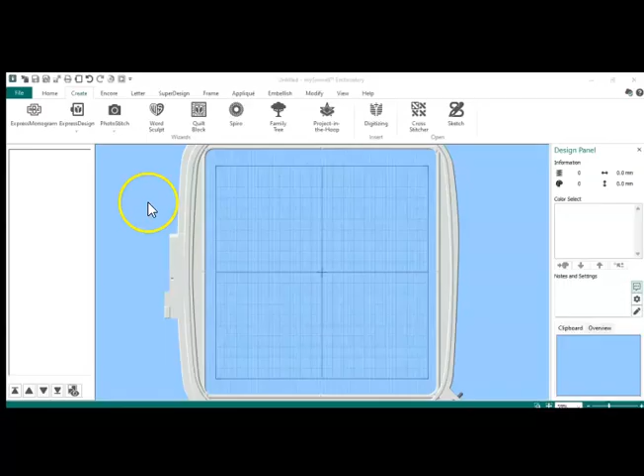Okay, so let's begin. I am in the Platinum version, and I'm going to go to the Create tab, to Digitizing. I'm going to hit cancel here, and go and insert my applique. I have one that I've been playing with, and I'm going to change my hoop.

Alright, so the big thing is to understand all these slides over on the film strip. Number one, I have to ungroup things, so I'm going to right click over where it says group and say ungroup. There's a whole lot of running stitches there, and those are basically placement stitches. And pattern fill, that would be the little paws down here. And we have placement stitches again. And what I'm looking for is the satin column.

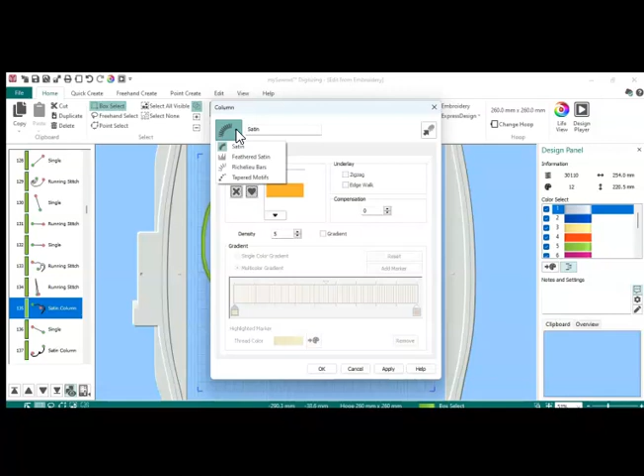And right there is one of the satin columns. When I click on it, it highlights. I can right click, go into properties. Right now it's filled with satin column, but I'm going to click over here and convert it to a satin area.

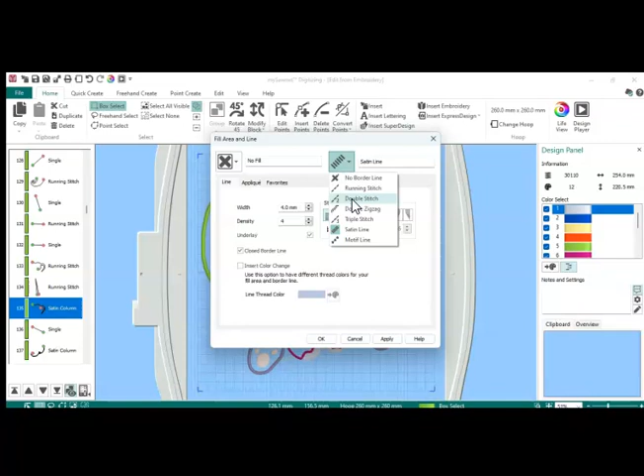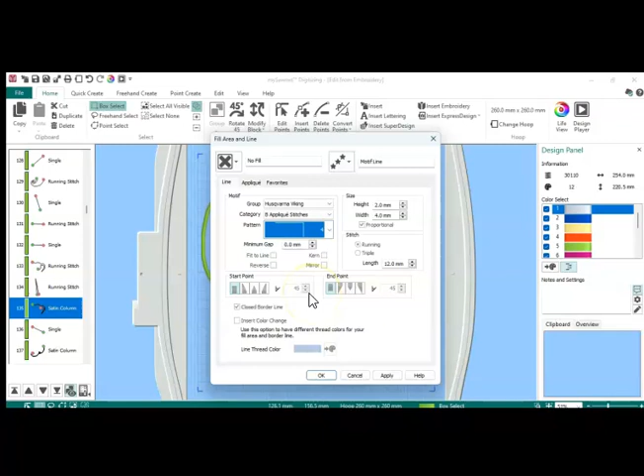Now I am going to say no fill there, and I'm going to say I want to change it to - could be a double stitch, could be a motif line. If I wanted to, let's see, I am going to go into the Husqvarna Viking group, into the applique stitches, and I will often use number 4. Let's see what it does. So I'm going to apply.

So basically what it's going to do is put that applique stitch there. And because this is a filled design, you're going to see 2 rows of that motif. Let's see - properties, applique, no fill, motif line. See, the original stitch was done as a fill. So that's why we're getting that.

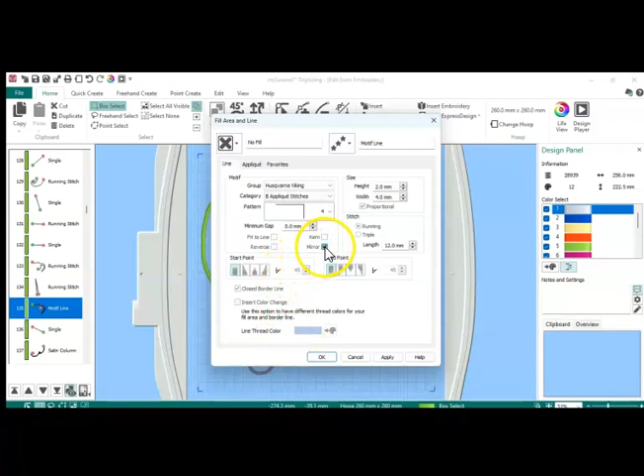And we can say mirror image here and have the raw edge applique go to the inside of the applique, or we can have it go to the outside. That's the reverse and mirror. We can also make the height of those applique stitches longer. Okay, so that's how that is done.

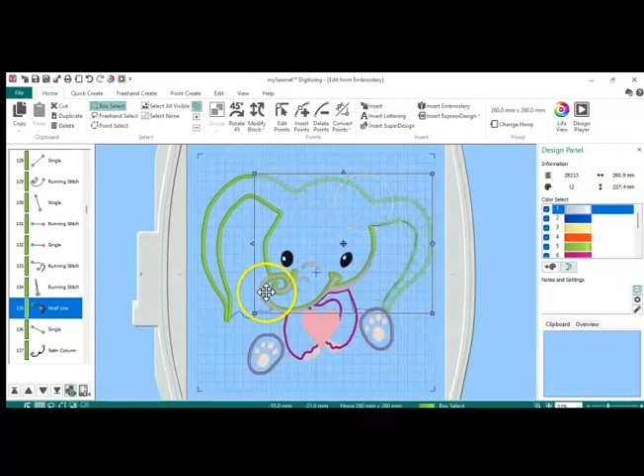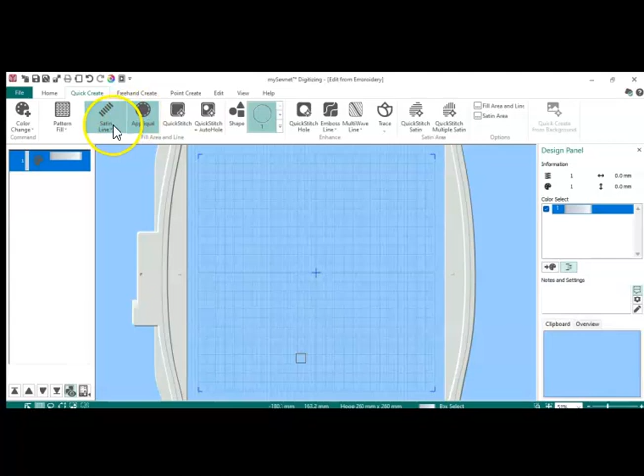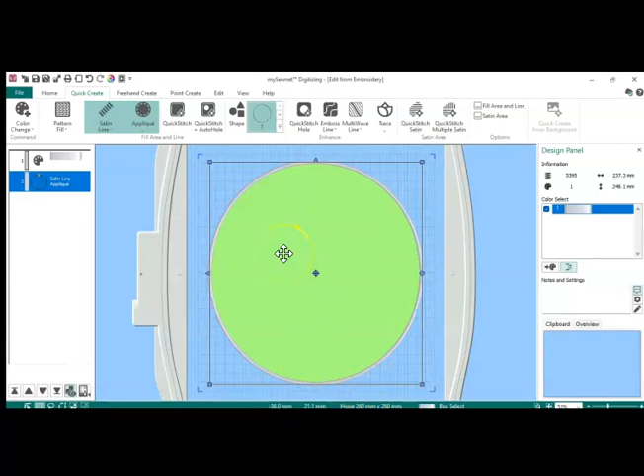And I will say none and say OK. It took away the fabric. It didn't necessarily take away that it knows that it's an applique - it still knows it's an applique. The applique is still highlighted here.

Okay, so I can right click. I can make my satin line wider or narrower. I can increase the density. And I can also change the stitch.

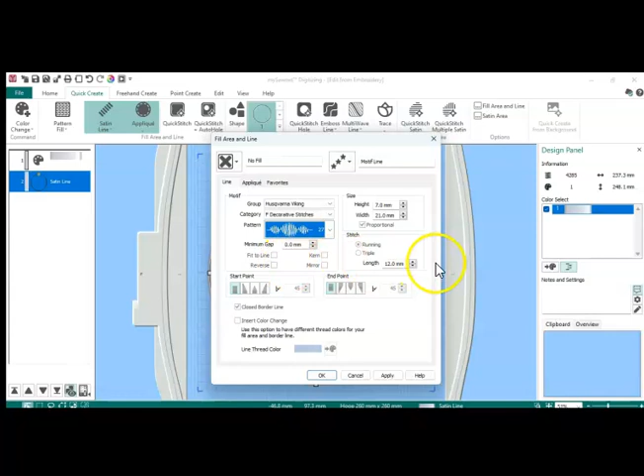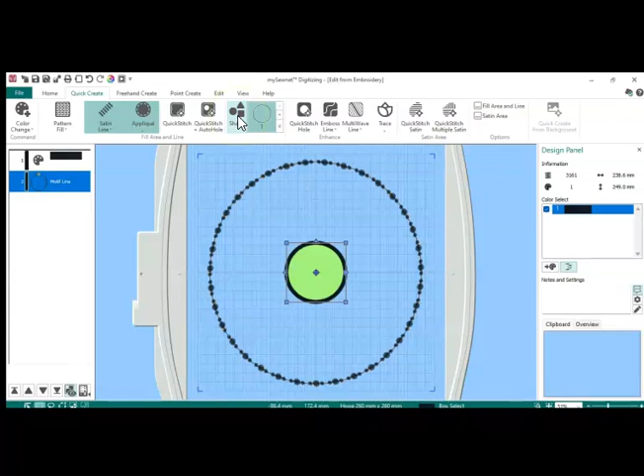So instead of a satin stitch, let's go down here and do this stitch instead. And I'm going to change the color by double clicking, left double click. I'm going to put the color black so you can see what's going on here. And the reason why I take the applique fabric out of there is so that I can see what I'm doing.

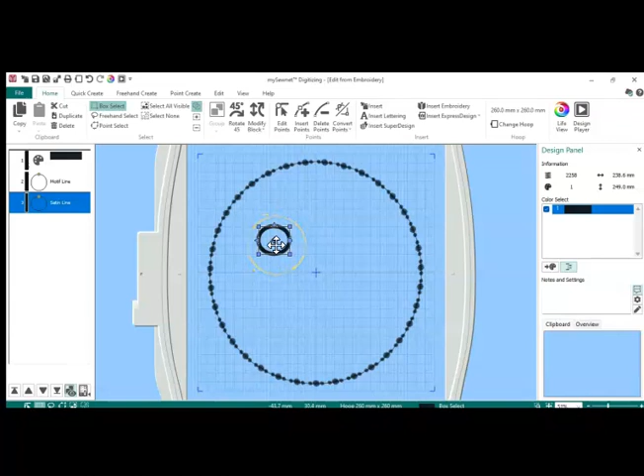And I want to box this in, so I'm going to go Home, Box Select. I'm going to move this up here, make this smaller. I'm going to do a right click. I need to get my box back again. I'm going to do a right click over here and do a copy. A copy puts the copy right on top of the item you're copying.

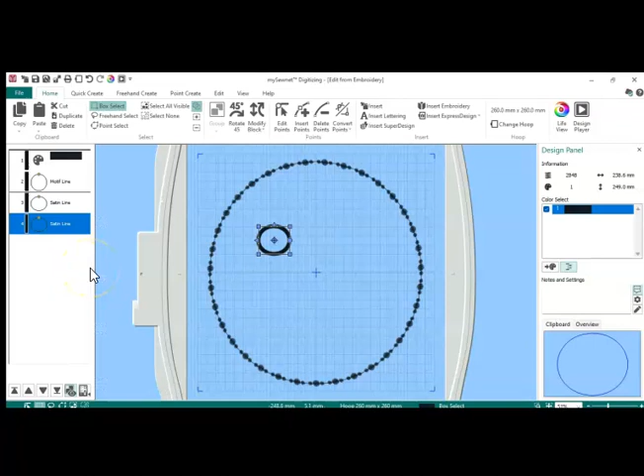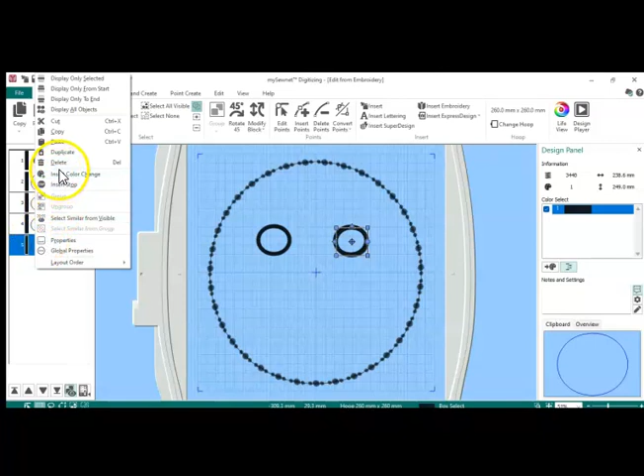Whereas a duplicate - let me show you what a duplicate does. So if I say duplicate, you see how it took it down to just off of the original copy, so you can see what you're doing there. Sometimes it's a good thing, sometimes you don't want it to be just off to the side. I'm going to delete that one.

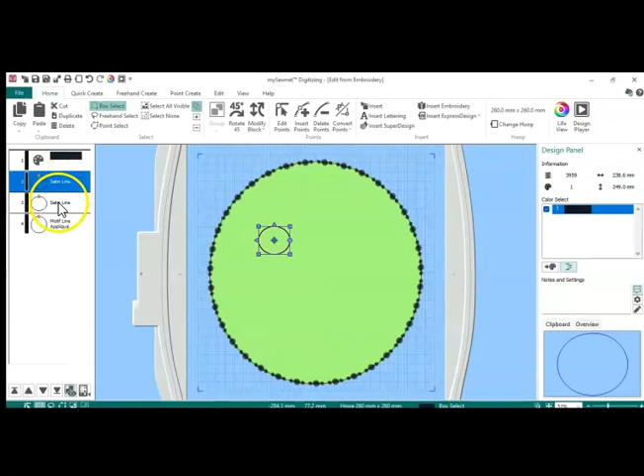So say I had these two eyeballs that I did first, and I had my applique on here. Now I can't see my two eyeballs and where they're supposed to be. So I'm going to drag the eyeball down underneath. It's just easier when I don't have the fabric in place.

So I'm going to do one more thing here. I'm going to right click and go down to Properties. I'm going to go into the applique. We can do a standard applique and select Fabric. So Quick gives you just colors. Fabric will allow you to load a previously saved fabric or add a new background fabric.

So if you had a specific fabric you wanted to use, you could take a picture of it with your camera and add it that way. Saved fabrics are right there, and you can mess with any of those. Once you've used a fabric, it's going to show up down here. So you can see that I've already used the green.

And if I want to change the eyes into something else, I can right click and go to Properties. I can say Applique, I want a standard applique, I'm going to select Fabric. I'm going to use black applique fabric and say OK. Apply, OK. So that's using black applique fabric.